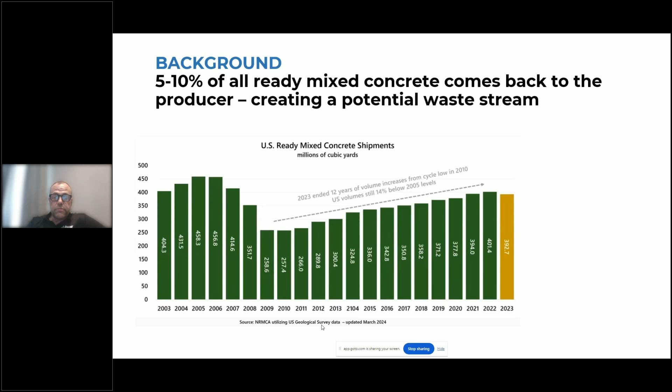And with the industry, we know that there is concrete that's been returned. Between 5 and 10% of all the ready-mix concrete that's produced goes back unsold to the producer, for reasons of over-ordering, or there might be quality issues. But the fact remains that almost between 19.6 and 39.3 million cubic yards are returned, and they present a potential waste stream.

This, in combination with the truck washout slurry, which is another major waste stream that we take care of with the Re-Con line, that's the motivation for MAPEI to be in this business of the Re-Con line.

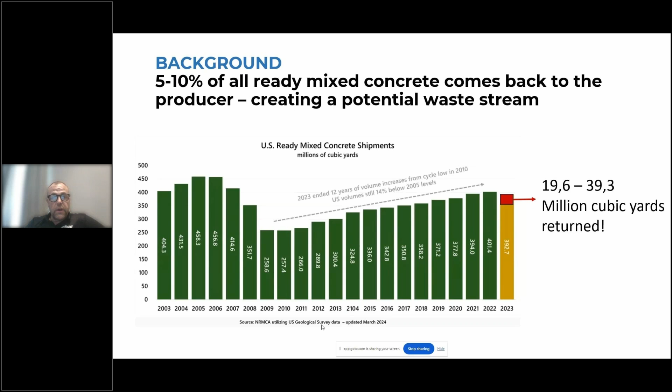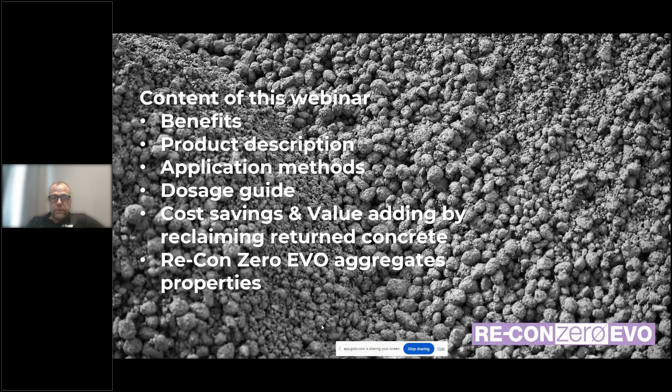So the content of this webinar is: I'm going to go through the benefits of the product, a more technical description of what it is, how you can apply it, and how you dose it in your return concrete. Then we'll have a brief look at the economics, the cost savings and value added by reclaiming return concrete with Re-Con Zero EVO. And then the final section on the end product, the actual aggregates that you get out of this process. So we'll start.

First of all, benefits: reclaiming return concrete into recyclable aggregates. What we have is an alternative solution to what's been available in the market for some years, crushing or wet processing. What we have is a two-component powder product that you apply directly in the return concrete, and the transformation happens chemically and not mechanically. The benefit is, with the two-component powder system, we have a higher quality end product compared to other suppliers on the market that only have a one-component product.

It has a very low environmental impact, and it's cost effective. We are not using high investment equipment, we are not using diesel, and we don't have any filter press needed. So the benefits are low noise, low dust, and very low fuel consumption, because we use the existing machinery on site, the truck mixer or a wheel loader.

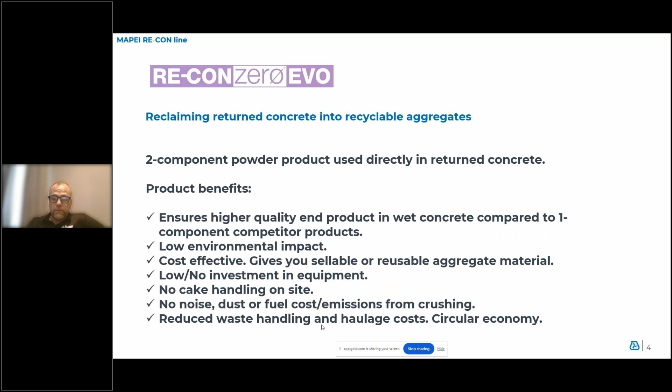Not in the webinar today is how we handle the truck washout slurry from empty, dirty trucks. That's a separate subject called dry washing. That's also in the Re-Con line.

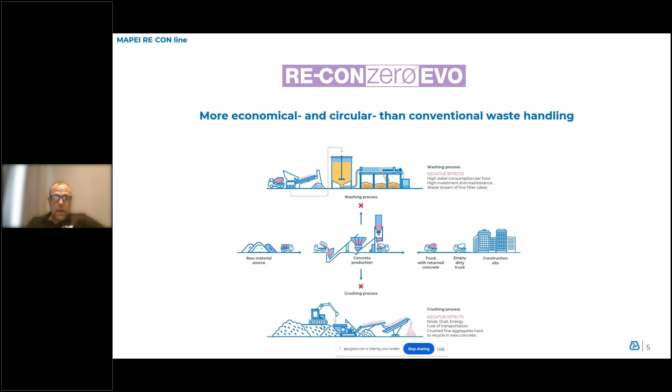So the product, what is it? Well, like I said, it's a chemical product. Comes in two components, part A and part B. Both are powder. They are packed in water-soluble bags so that you can handle them safely, even though PPE is needed to be worn, but you have your gloves and you never get in touch with that powder. You see the specifications, the densities, and it contains no harmful substances.

We at MAPEI, we have the safety data sheets available if you need them. But those on the picture, you see those actual bags that you will be throwing into the fresh return concrete.

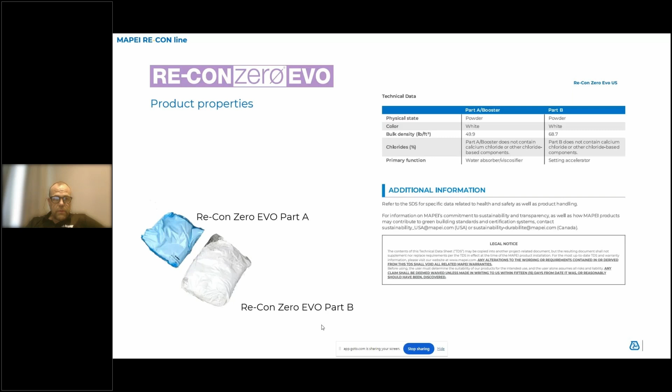So the packaging of the product, you could basically order the two components, Re-Con Zero EVO, part A and part B, in a convenient plastic bucket that would treat 7 yards of return concrete.

Because you need, as a standard, I will go through the dosage recommendation, but our standard recommendation is you use 1 part A and 1 part B for every cubic yard. Then there is the opportunity to only use part A when the conditions permit, and that will make it even more cost effective, because 2 components is obviously a little bit more expensive than just 1 component. So you can buy the products in these two packages.

Application: how do I apply Re-Con Zero to return concrete? We have basically three methods that we recommend. The first one is for the normal loads, let's say. Most returned concrete comes back in loads that are less than 4 cubic yards. That's not to say that bigger loads don't exist.

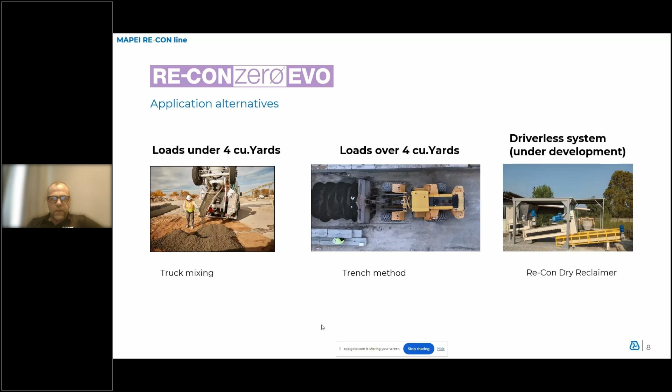Truck mixing happens in these steps. You look into your drum and see how much return concrete you have, and based on the dosage guide that I will go through later, you throw your bags into the concrete. It's important that they hit the concrete and not the walls, because if that powder, which absorbs water very easily, hits the steel walls, it will get stuck there and create buildup. So it's much better that it goes into the concrete where it's supposed to be.

That's the next phase, where the agglomerated concrete needs to dry and harden, because it comes out still moist. If you leave it in a big pile, it will form a quite hard pyramid. So the secret is: spread it out, use a wheel loader or skid steer to spread it out and let excessive moisture evaporate, and let the product work to start the hardening of the granulates.

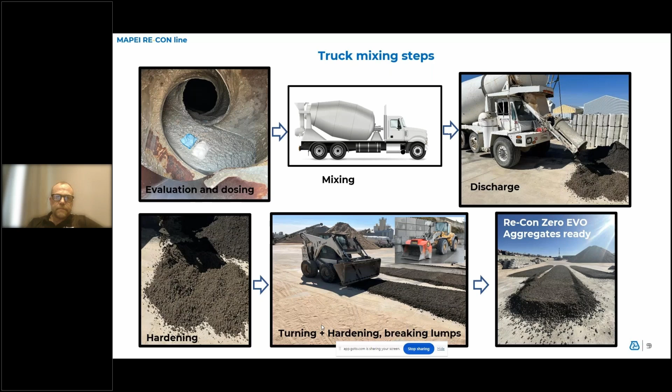This slide just illustrates again the mixing procedure. It's important to break up the bags so that it takes about 2 minutes for the concrete itself to break up the water-soluble bags and dissolve the powder in the concrete. Then it's important to make the most of the mixing procedure because you want to clean the truck at the same time.

So rotate the drum backwards and forwards a few times; that will make sure you clean the wings on the inside of the truck on both sides, and you really utilize the most of the product. So you end up with a very clean truck, and you have transformed all the return concrete that's in the truck.

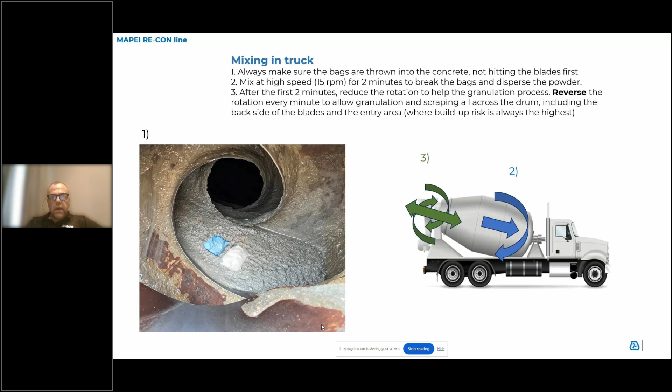Discharge, again, you listen - your ears are probably the most important tool here, unless you climb up the ladder and look into the drum. But you will hear when the concrete goes from this fresh state to the granulates. And when you hear that, it's time to reverse the drum and empty the material on the ground.

Try to do that as quickly as possible, especially if you have very big loads. You could risk that if you keep turning the concrete around, after let's say 10 to 15 minutes, the superabsorbent polymer that is part A can no longer hold the water, and the water will go back out into the concrete, and it will then be more like concrete than granulates.

So speed is important, and that's again why when we have bigger loads than 4 cubic yards, we recommend doing that outside the truck so that the discharge time will not create that risk.

And don't build high piles. Try to fan it out as much as possible, because it makes it easier to turn the material around and get that evaporation going over as big a surface area as possible. Then your material dries out and you don't form the lumps that you need to break. Some lumps you probably have to break up with a wheel loader, but it's much easier if you have the space available and spread it out in the first place.

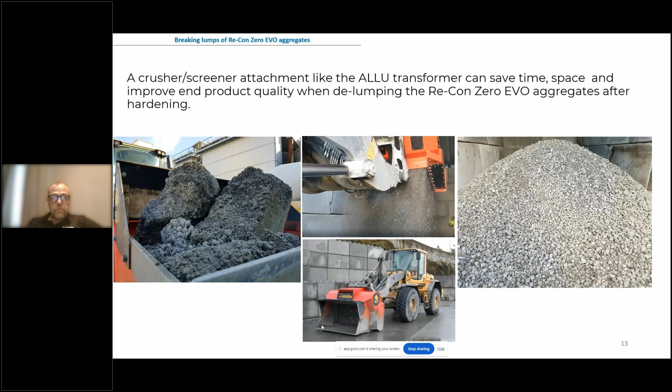The dosing of Re-Con Zero EVO is simple and complex at the same time. I'll start with talking about the different roles, and that, I think, in a way explains the whole concept.

Part B is a setting accelerator, and its role is to really kickstart the reaction between water and cement. So we flocculated the cement and the water, because in concrete the cement paste is the mix of water, cement, and some superfines from our sand, and that is what we're flocculating, making that cement paste form lumps and also attach itself to the larger stones in the concrete. So if we have a high water cement ratio in the cement paste, or a low temperature, this setting accelerator can really help speed up that process. That's the role of part B.

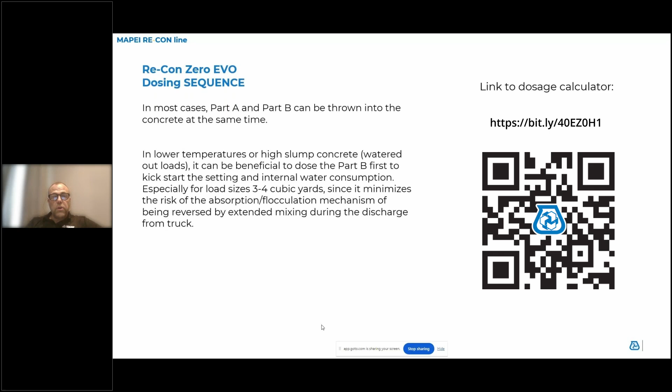Then we go to treating the larger loads and using the trench method. As I said before, this is about making the truck driver available for a new load quicker, because a big load first of all puts some stress on the concrete truck mechanically to process big loads.

I know American concrete trucks from testing, and American concrete trucks are much tougher than European ones. I've done demos in the US with big loads and they work perfectly fine. So take this as a recommendation that's a little bit European. I apologize for that, but we have to keep that mechanical stress in mind.

But then there's the time it takes, and that's the same in Europe as in the United States - one minute is one minute. So holding up the driver for a long time can be negative from the cost point of view.

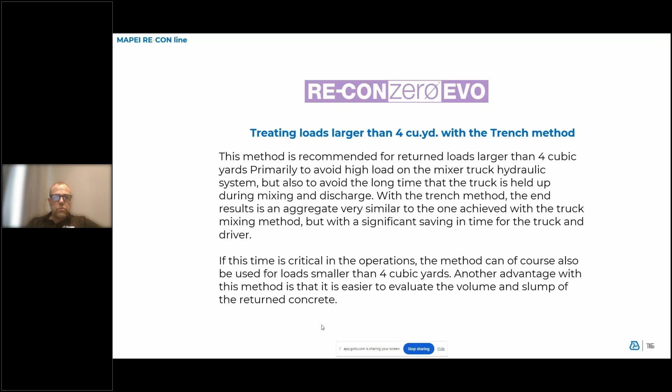That's why we looked at the trench method, and it's very, very simple. Basically you build up a 3-wall bay with concrete blocks, and if you want to, you can line the floor with some Re-Con Zero aggregates you've already produced, because that will help soak up some of that moisture and help the agglomeration of forming the aggregates. So that's easy.

Just be aware that the back wall should be very, very sturdy. Back that up, because as you will see - well, we'll come to that later.

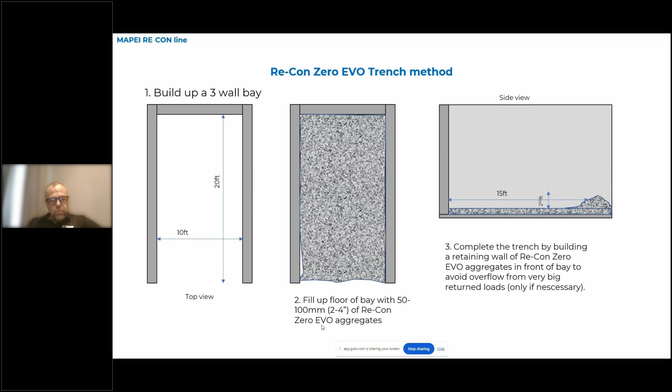First of all, you use this bay as a pool. So the concrete truck fills up the bay, and then he's free to go. He can go to the next job.

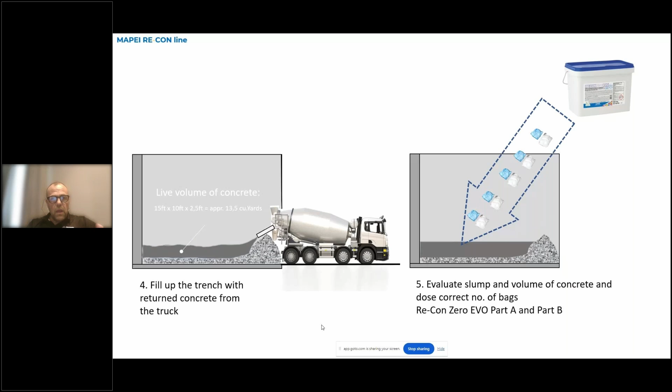You evaluate the load size and wetness, etc. You can use the dosage guide for that as well. And then you add the Re-Con Zero powder by throwing the bags into the concrete. Having done that, you use the wheel loader to turn this material over and over and over.

And very soon, in a matter of minutes, the aggregates will start to form, and you will transform the wet concrete into granulates. We have a video on this process. For technical reasons we chose not to show it to you today, but it can be part of an info package that we will send out on completion of this webinar.

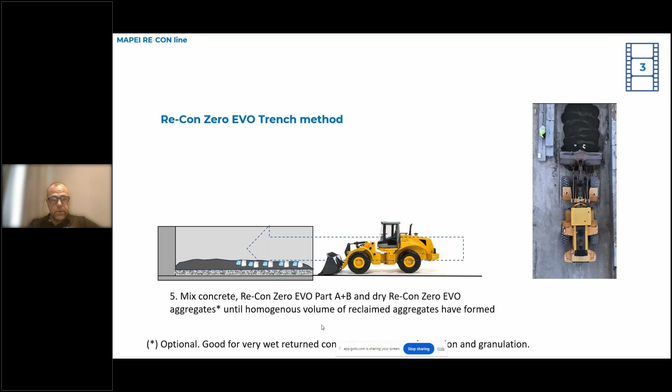So those were the two major methods, and then the driverless system is going to come and be introduced in the US in the future. So we'll have an opportunity to come back with more details on that machine.

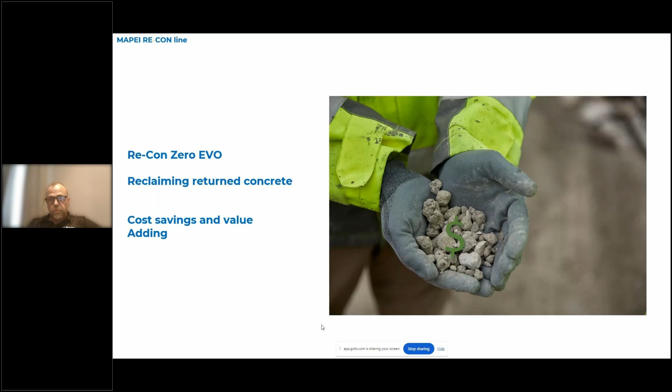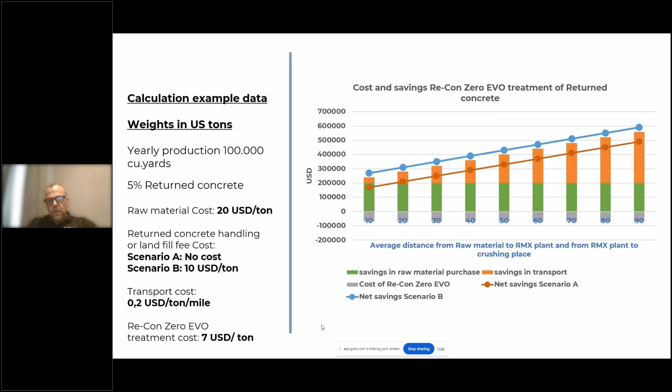So to recap on Re-Con Zero and its benefits: very low environmental impact, cost effective, and you have an aggregate factory in your own backyard by transforming the return concrete into aggregate material. There's very low, basically no investment in equipment needed, especially compared to the processes below and above, either a wet washing process or crushing equipment.

And if we take the example of the crushing process, Re-Con Zero has very low noise and no dust. So if you're in an urban environment, you can do that without creating complaints from your neighbors about noise and dust from your return concrete treatment. You're also reducing haulage cost, less waste going out of the plant, and less raw material you have to bring in. So that's, in summary, the advantages of Re-Con Zero.

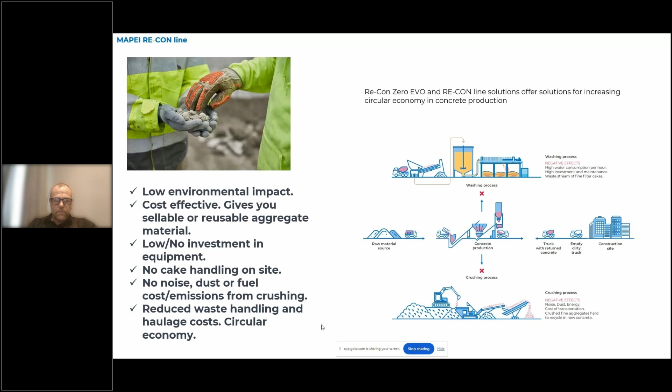So we move to the aggregates. What do they look like? What can you do with the end product? This is a complicated graph, I know, but I'll walk you through it.

It's a sieve analysis of Re-Con Zero aggregates. The blue line represents a typical aggregate as it would be before it's mixed into concrete — we know concrete is a mix of sand, stone, water, cement and admixtures, so what you get out is exactly that. When you add Re-Con Zero, all the powder does is agglomerate the very, very fine material at the lower end. The gradation curve of Re-Con Zero aggregates is much coarser because it's agglomerated into bigger particles.

So we've had customers who investigated this and can then sell this as a base course aggregate, unless you want to recycle it into new concrete. The green dots represent the lower and upper limits of base course material.

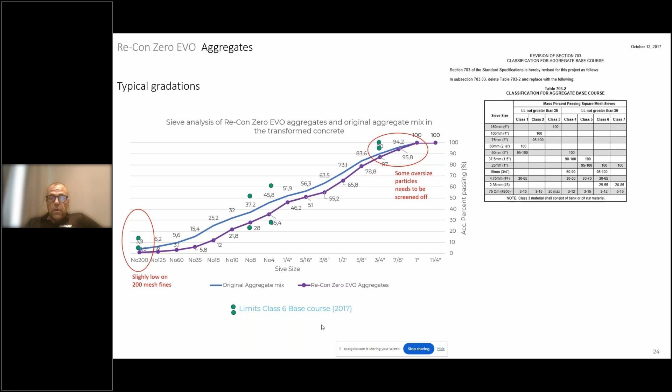A customer in Colorado used this material to make his own access road in and out of the concrete plant, and it packs really well. At the same time it drains really well, so it can handle very heavy turning traffic - cement trucks coming in, aggregate trucks going in and out of the plant, concrete trucks constantly on that road - and it's a very, very good road base material.

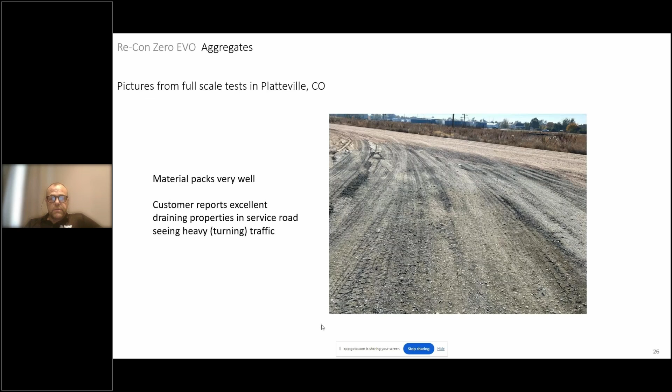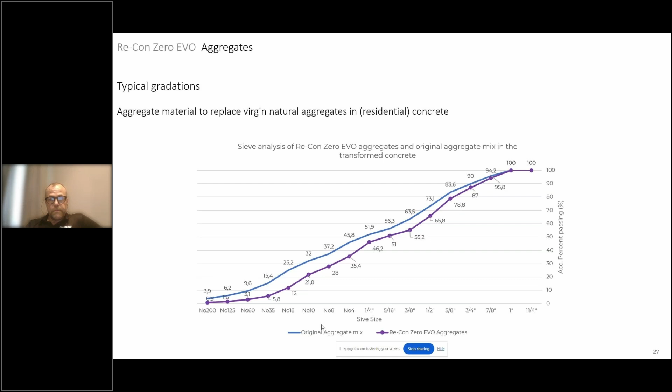Again, to make it a little bit simpler, this is a graph that just shows you how a typical gradation of aggregates looks. When we look at using recycled aggregates back into new concrete, we will have to do concrete tests, and that's exactly what we've done.

We've used American materials, American cements. We did the tests in Texas, and we used different replacement ratios of Re-Con Zero EVO aggregates, and we tested the strength of that concrete at 1 day, 7 days, 14, and 28 days.

We found that if we use a system of MAPEI admixtures - Re-Con Ag 100, which is a water absorption inhibitor that helps keep the slump high even if you use recycled aggregates at high replacement levels - combined with Dynamon admixtures as your normal water reducer, and a strength enhancer called MAPEI 60.

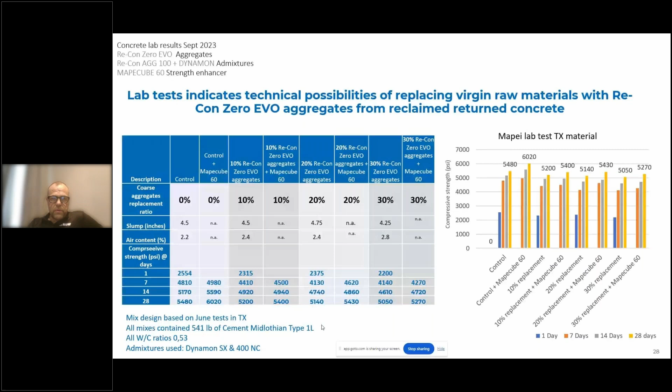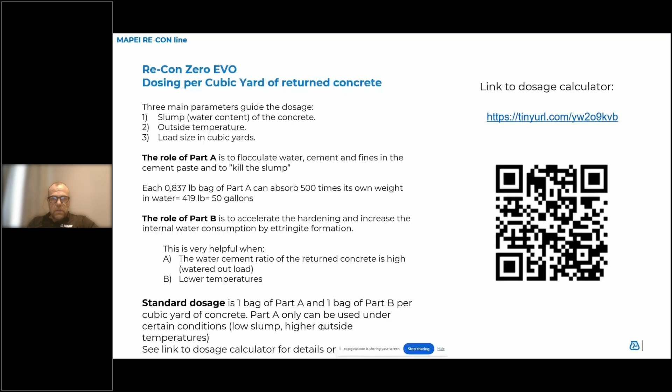The first question is, can you please explain the two different components of the product and what they do? Sure, let's go back again to repeat - I know this can be a little tricky. So I go back again to this slide. Oh, let's go back even further, because here you see it actually.

Let's say the driver has wetted his concrete - he's had a long drive back from the plant, from the customer, and he's put in some water, so you're not really sure of the water cement ratio of the full concrete mix. Part B will be there and almost act as a cement, or it will activate more the cement set that's in the concrete. So that's the two components.